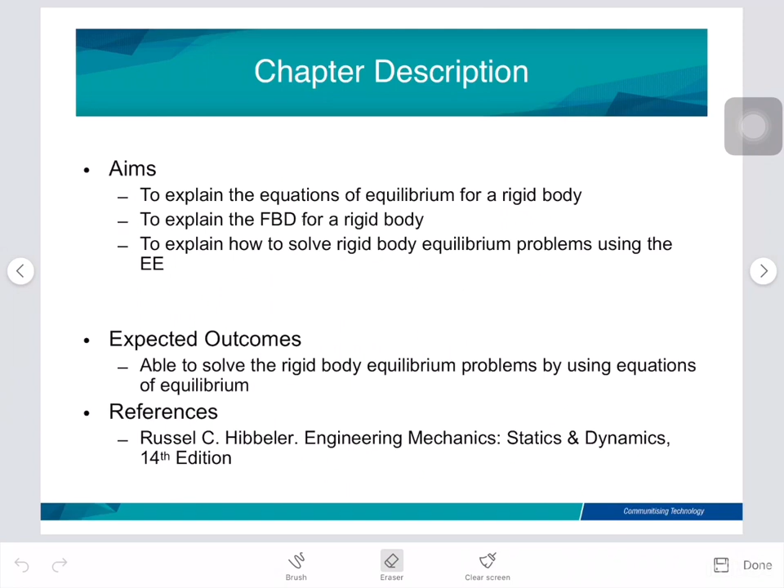Today we continue our new topic on equilibrium of a rigid body. The objectives of the lecture today are: number 1, you should be able to explain the conditions of equilibrium for a rigid body. Number 2, you should be able to sketch the free body diagram for a rigid body. And number 3, you should be able to solve the rigid body problems by using equations of equilibrium.

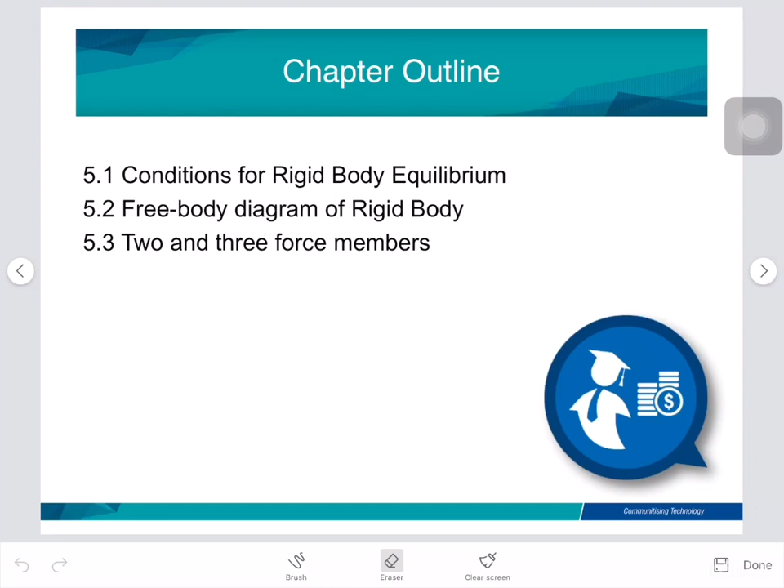Before that, we need to study what is the condition for the rigid body equilibrium. So here, what is the main difference between a particle and a rigid body?

Number 1, a particle is an object model, modeled as a particle. Number 2, it has a mass, but we neglect the shape and size. Number 3, for a particle to be in equilibrium, the sum of all forces acting on the particle is equal to 0, meaning the summation of force is equal to 0.

Now refer to the rigid body. So what is the rigid body? A rigid body is the complex level in the modeling of an object. It is a composition of many particles. And number 3, it can be any size or shape, unlike the model of a particle.

And then it can support moments, and it also has a support that prevents translation of the body in a particular direction, so the support exerts a force on the body in that direction. And if rotation is prevented, then the support exerts a couple moment on the body. So that is the difference between a particle and a rigid body.

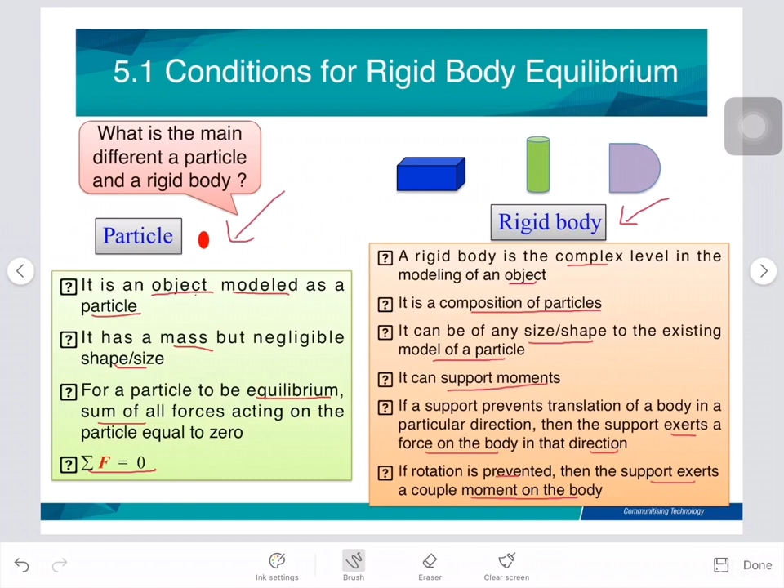Before we studied a lot on particles, now we focus on rigid bodies. Right, next.

What is the condition? You may refer to this figure 1 and figure 2. So what is the difference between figure 1 and figure 2? Figure 1 shows a particle, so normally force on a particle is concurrent, right? This is concurrent. Now we look into the force on the rigid body.

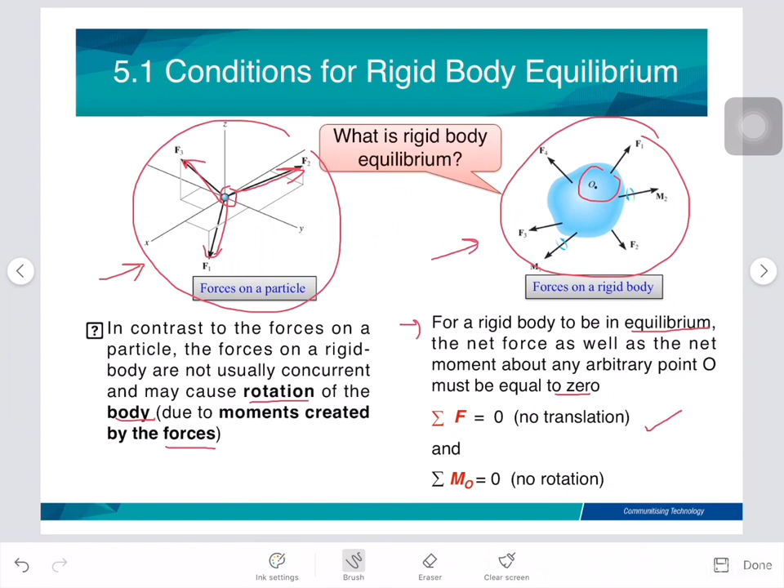Look at the force on the rigid body. In the rigid body, the forces are not usually concurrent because they may cause rotation of the body, which means moments created by the forces. Therefore, for a rigid body to be in equilibrium, the net force as well as the net moment about any arbitrary point O must be equal to 0. This means the summation of force equals 0, which means no translation, and also the summation of moment at point O is equal to 0, which means no rotation.

Next, we want to know the equations of equilibrium for 2D. We have a short name here: equations of equilibrium becomes EE. So when I mention EE, EE means equations of equilibrium.

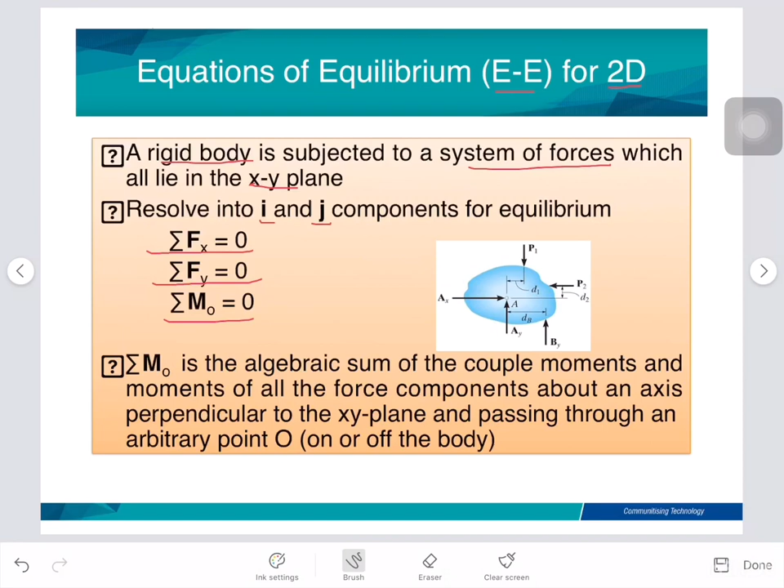Now for 2D, a rigid body is subjected to a system of forces which lie in the X and Y axes. For X and Y axis, we can resolve into I and J components for equilibrium. So when we resolve to I and J, we have summation of force in X equal to 0, summation Fy equal to 0, and summation moment at point O equal to 0.

Next, we have two alternative steps here. Number 1, if the line passing through points A and B is not perpendicular to the a-axis, we can have summation Fa equal to 0, summation moment at A equal to 0, summation MB equal to 0.

And second alternative, if points A, B and C do not lie on the same line, we can assume that summation moment A is equal to 0, summation moment MB is equal to 0, and summation MC is equal to 0. In order to understand more, we can see it when doing the example.

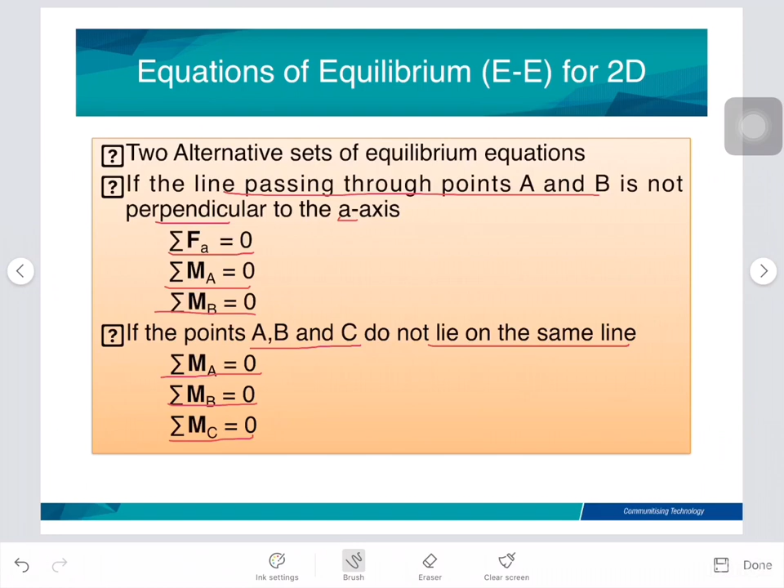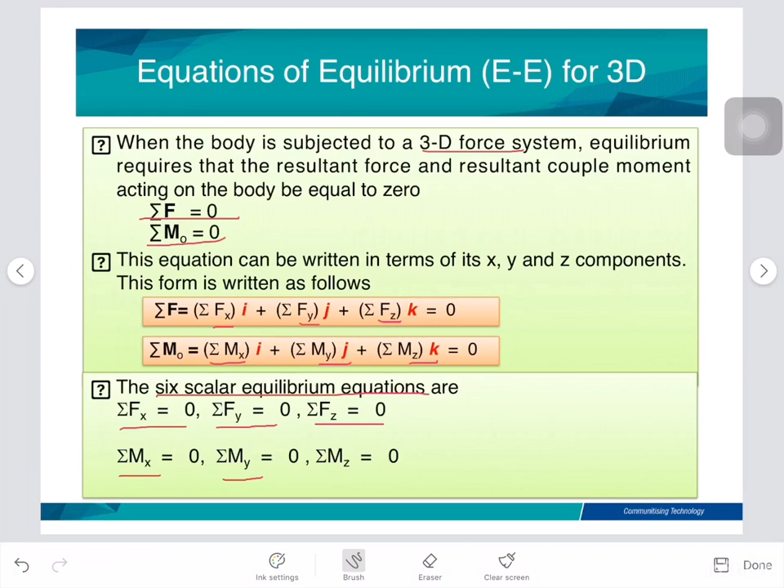Summation Fx is equal to 0, summation Fy is equal to 0, summation Fz is equal to 0, and also summation moment Mx equal to 0, summation moment My equal to 0, summation moment Mz equal to 0. This is for the 3D cases.

So now take a look why we need to study the rigid body equilibrium. For this figure shown, we have a uniform ramp. This ramp has a weight of 400 pounds.

Normally when we have the weight for the ramp, where is it acting? You must remember that. It is acting at the centroid of the body. So this one we label as W, weight.

Number 2, the ramp is pinned at A and held in position by the cable. So now we have a pin. Pin is one type of support reaction, here at point A, and then we have cables here. When we have a cable, we need to know what is the tension in the cable. So for this case, how can we determine the force acting at pin A and the force acting in the cable?

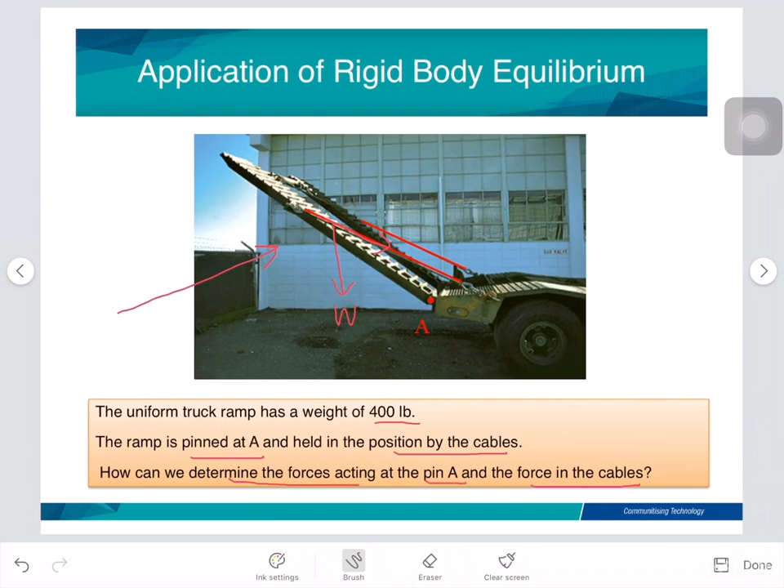So we need to draw the free body diagram. How can we do that? Now refer to this figure. From this figure, we need to transform into this free body diagram. FBD means free body diagram. So in the free body diagram, what should you mention, what should you sketch?

You need to sketch the ramp. This is the ramp. Now, the question mentioned that you have the self weight. So self weight W must act at the centroid like this, 400 pounds. And then we have the tension cable here. In the free body diagram, we must show this is the tension. Don't forget to label. And then we have pin support here.

So what is the pin support? You may refer to this, this is the pin support. When we know this is pin support, we need to know how many reactions at pin support. Pin support has 2 reactions, one vertical and one horizontal. So this is the free body diagram that you need to sketch before you solve the rigid body equilibrium. Understand? Okay, next.

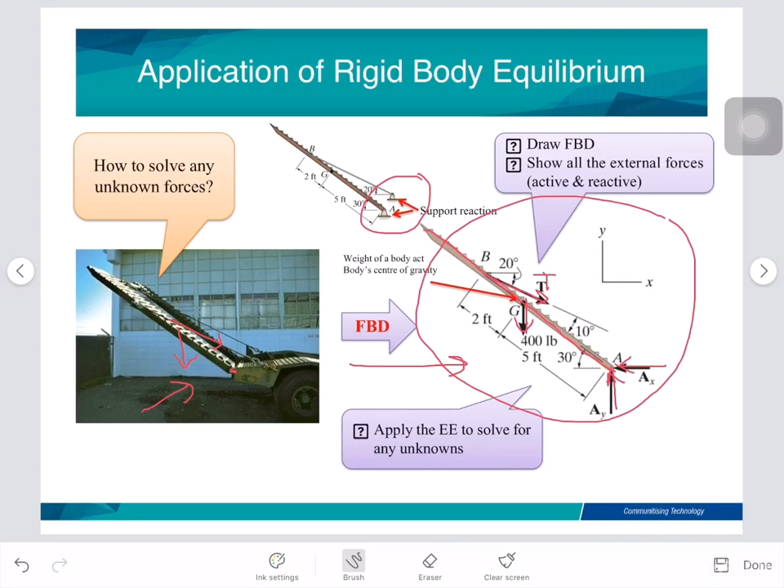This is another example which we have a cantilever beam here. This beam is 6 meters, and then we have a support at point A. The support at point A is a fixed support. Now, we also have a point load here. So this is the point load.

So how are we going to sketch the free body diagram? Number 1, when we sketch the free body diagram, you just make a line. After you make a line, you need to identify the external forces, any moment or applied load. Then you need to identify the support reaction, and whether they give you the self weight of the body or not.

If they have, you must show it. Number 1, remember the self weight must act at the centroid of the body. So let's say we have 6 meters here, the centroid must be at 3 meters, this point. And then we have the applied load here, so we just write back the applied load, 1,200.

And then here, fixed support. So fixed support, we need to identify how many reactions for this fixed support. Here we have 3 reactions: vertical, horizontal, and 1 moment here at point A. So this is how you should do it when you want to solve the problem.

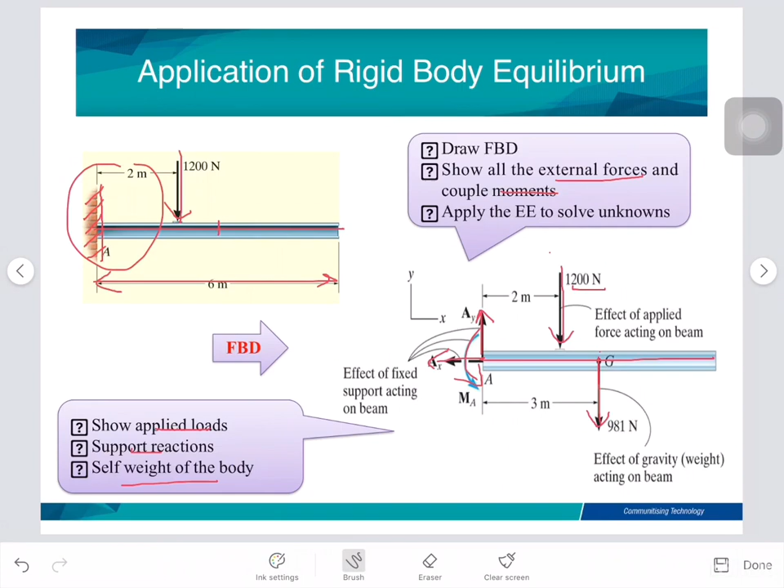Next, let's study the characteristics of the free body diagram. FBD number 1 is the best method to represent all the known and unknown forces. Number 2, FBD means you need to sketch the outline only, so you can isolate the surrounding. Number 3, you need to show all the forces and couple moments that the surrounding exerts on the body, so that the effect can be accounted for in the equilibrium condition.

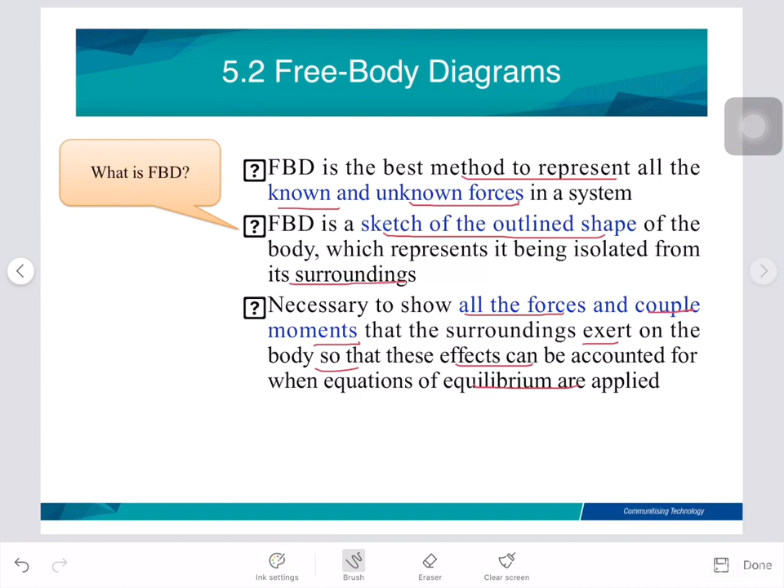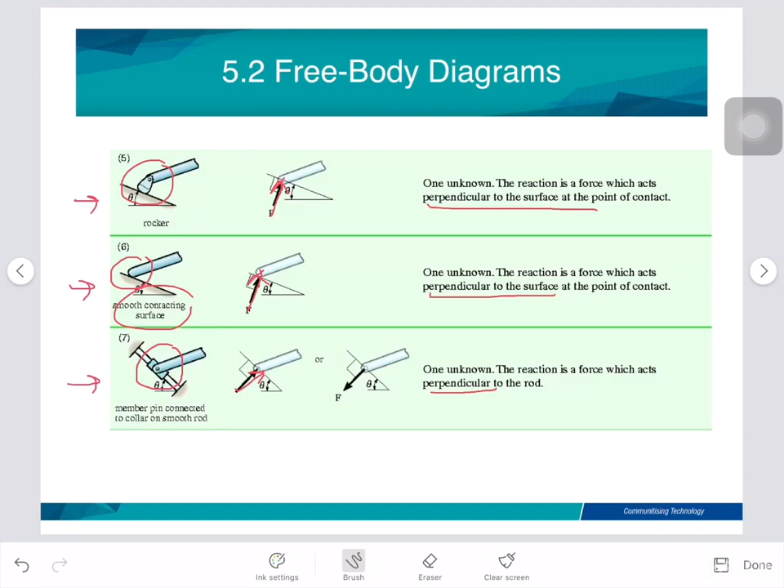And then this figure, we call member pin connected. You must be aware, this is the member pin connected. How many unknowns? We have one unknown, and this unknown also acts perpendicular to the rod. It can be like this, and also like this.

And then number 8, we call it a smooth pin or hinge. This pin or hinge has two unknowns. These two unknowns may have a component in y and a component in x, or you can resolve it as coplanar if you have the angle here.

And then the number 9 figure, we call it fixed connected. Just now we had member pin connected, but look at this — if we have a fixed connected, we're going to have two unknowns: one is the reaction force, and another one is a moment, which is perpendicular to the rod.

And then the last one, we have fixed support. This fixed support will have three unknowns: one moment, and another two are the reaction in y and reaction in the horizontal x. Or you can have this coplanar version — this is the force, this is the angle, and this is the moment. So this is the type of support or connection for the 2D cases. You have 10 types of connection, and you must remember this kind of thing.

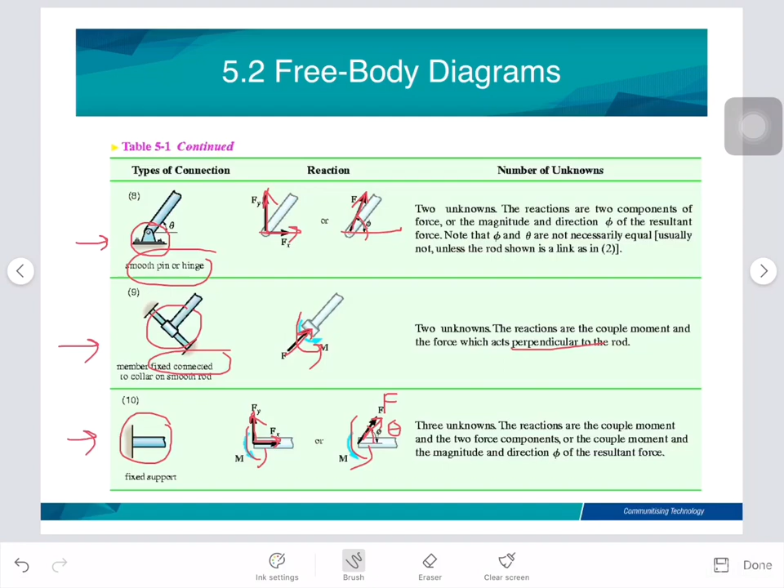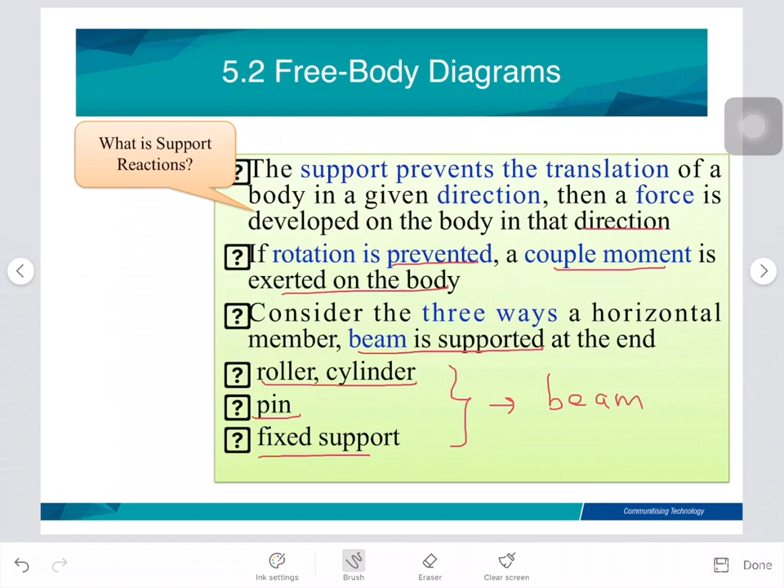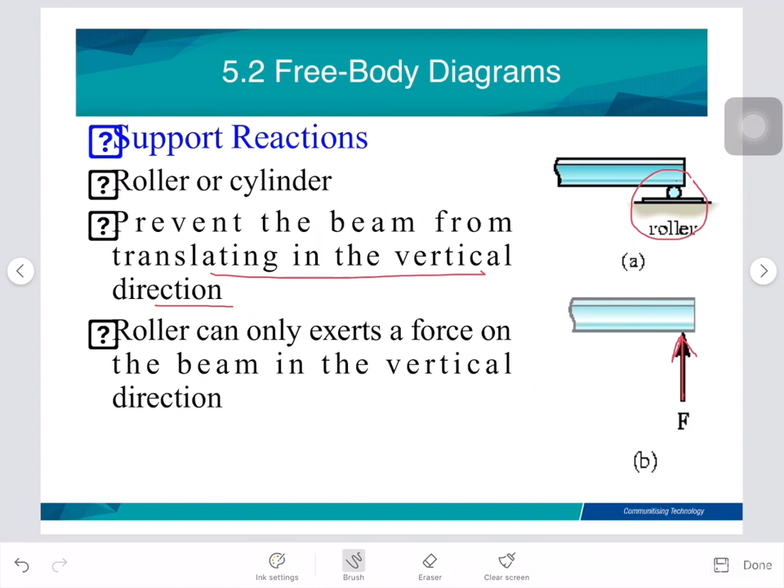This is an example for the support reaction. This is a roller — remember, when we have a roller, we have one unknown, and this unknown acts perpendicular to the point. So this roller prevents the beam from translating in the vertical direction. And the second one, pin — you can have this figure, or this figure, or like this, depending on the example.

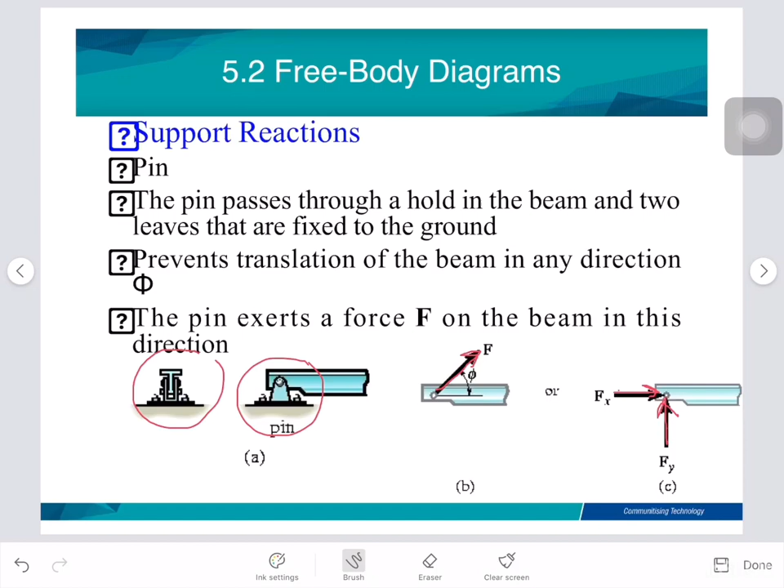So after you identify the type of support reaction, you need to know how many unknown forces there are. For this pin, we have 2 unknown forces, which means that this reaction prevents translation in horizontal and vertical directions.

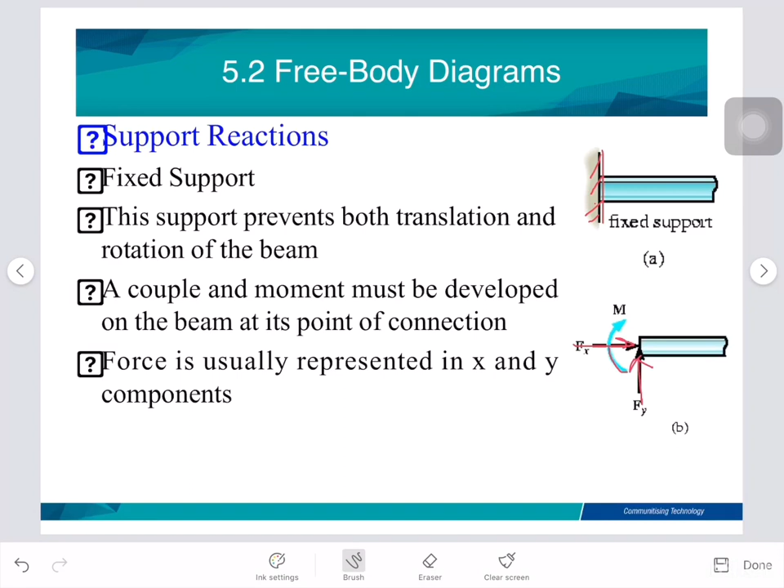This support reaction has 3 unknowns, which means that this support prevents translation and also rotation. Translation in x, translation in vertical, and then moment prevents rotation of the beam.

So this is the type of connection for real life. This is number 1: a cable exerts force on the bracket.

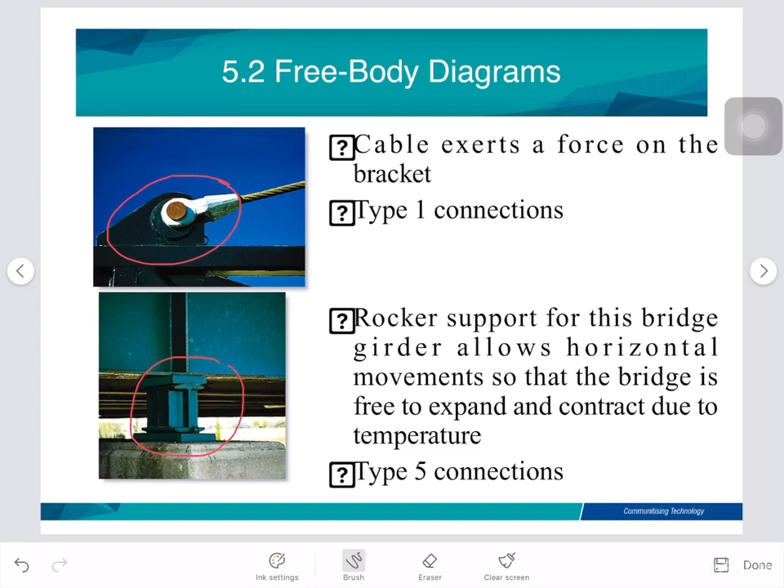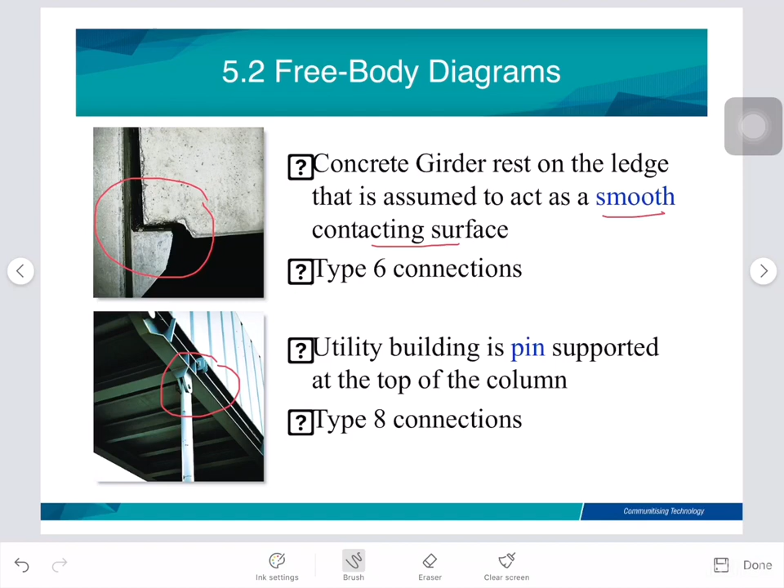Number 2 is a rocker, supporting the bridge girder, allowing horizontal movement so the bridge is free to expand and contract due to temperature. Then this one is a concrete girder resting on the ledge, assumed to have smooth contact. And this one is a utility building pin connected on top of the column.

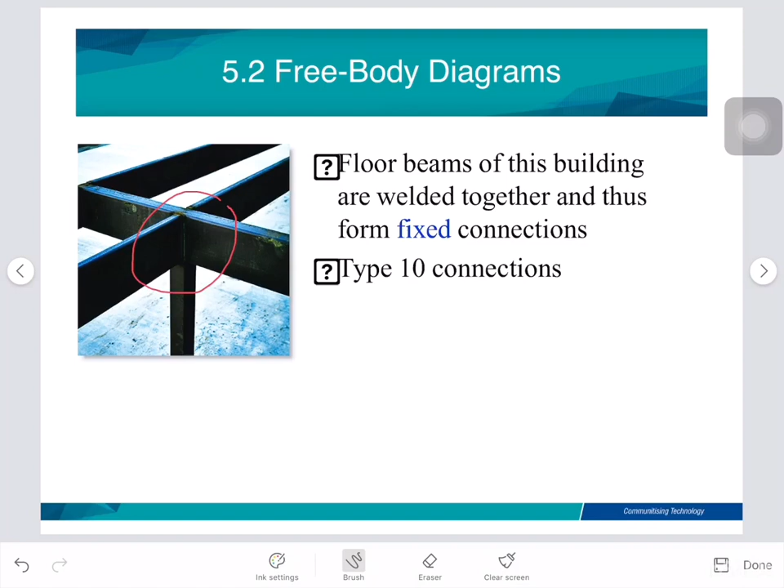And this one is the example of the fixed connection. The floor beams of the building are welded together and thus form a fixed connection.

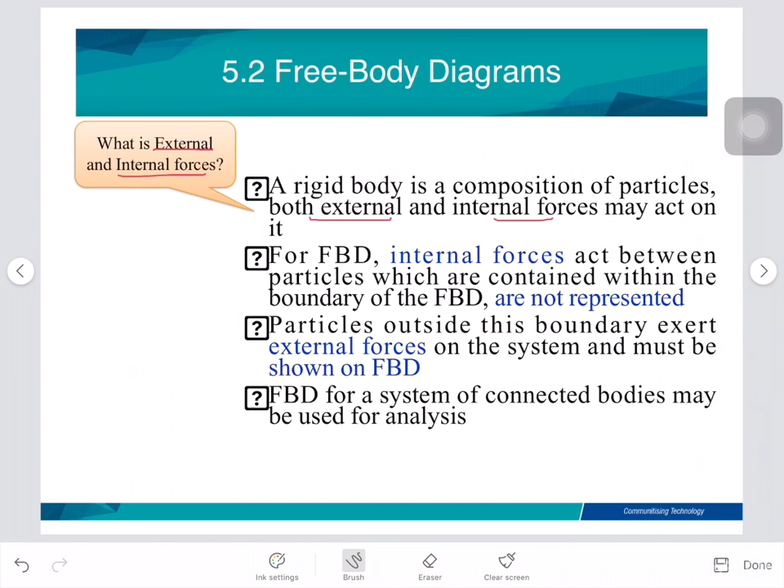Okay, the weight and the center of gravity. You must understand when a body is subjected to gravity, each particle has a specified weight. For the entire body, consider gravitational forces as a system of parallel forces acting on particles within the boundary. So you can present the weight by W.

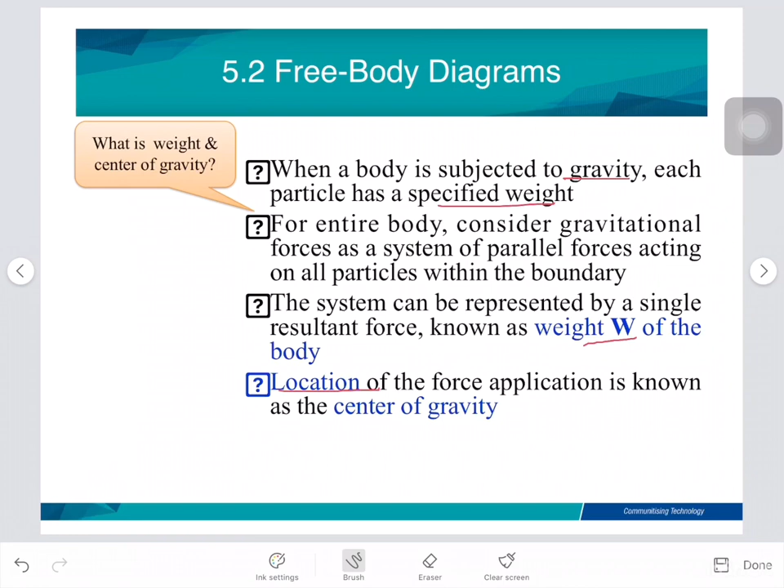When you define the weight W, you need to find its location. So the location of the force must be at the center of the body.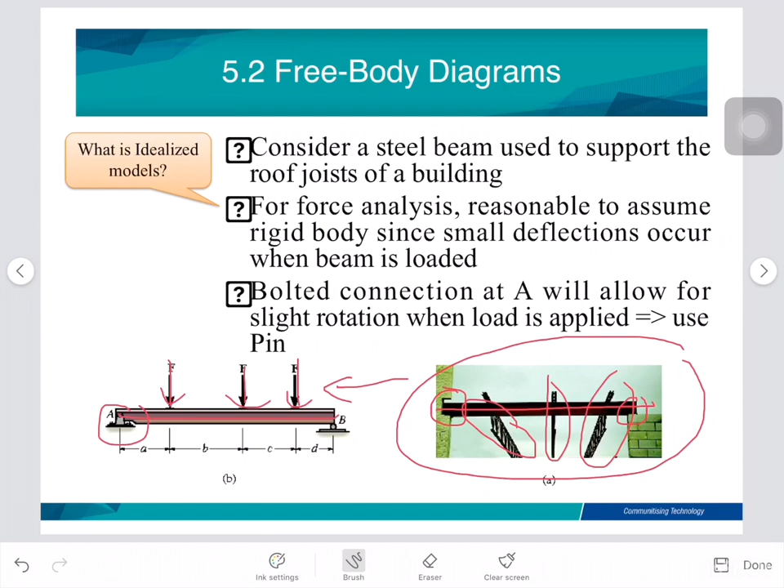So here this truss is represented by these forces. This one is this one, and this one is this one. This is the beam - this one means pin support, and here means roller support. So this is what is meant by the idealized model.

All right, so this is another one. You have here, you consider this boom supported by the pin. This is the pin at point A and point B. And then we have BC as a weightless link.

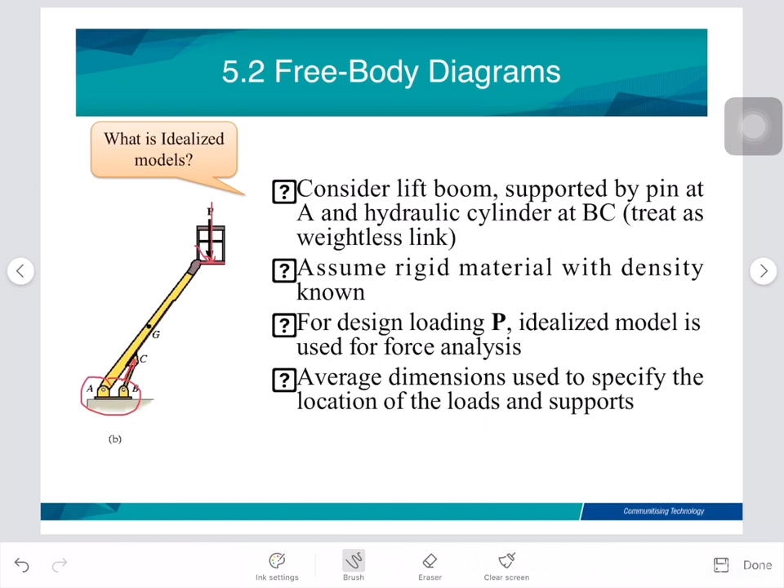Now we have the loading here, a point load here. Average dimensions are used to specify the location of the load and support.

So before we solve the problem for the rigid body, we need to know the steps to draw the free body diagram. So we have 3 steps here.

Number 1, you need to draw the outline shape. Imagine the body to be isolated or cut free from its constraints, so you can draw the outline.

Number 2, after you draw the outline, you must show all forces or couple moments. Couple moment means moment. Here you need to identify all the external forces or couple moments that act on the body.

And then you have any applied loading, and you need to identify the reactions that occur at the support, or point on the body.

And then you need to identify also whether the question gives the weight of the body, so you account for all the effects traced over the boundary - everything that is a force or couple moment acting on it.

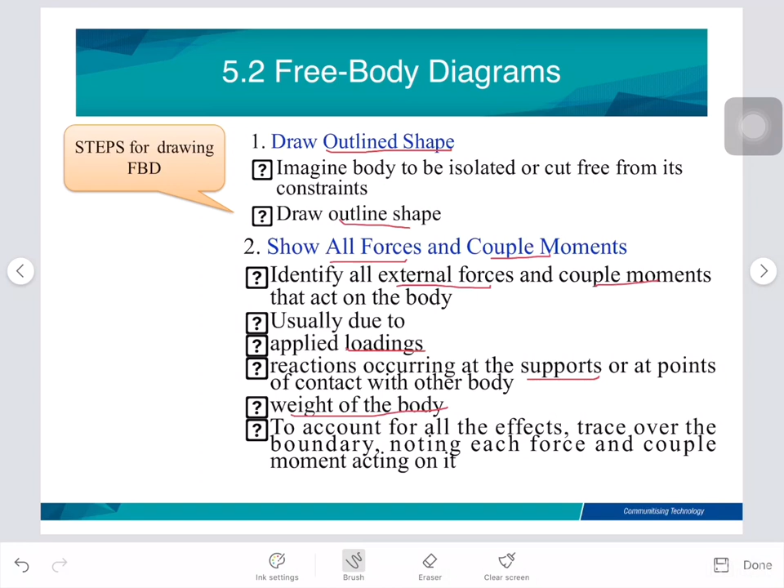And then the third one, identify each loading and dimension.

So for this example, we need to draw the free body diagram. How do we draw this free body diagram? So this is the weight, the weightless link, and the spring attached.

The operator applies a vertical force on the pedal so that the spring stretches 1.5 inches, and the force in the short link at B is 20 pounds. Draw the free body diagram of the foot pedal.

So now you can identify. At point B here, we have a link. How many unknowns does the link have? We have 1 force here, and then the spring - the spring also has 1 force here. And this one, what is this connection here? So here is a pin, right?

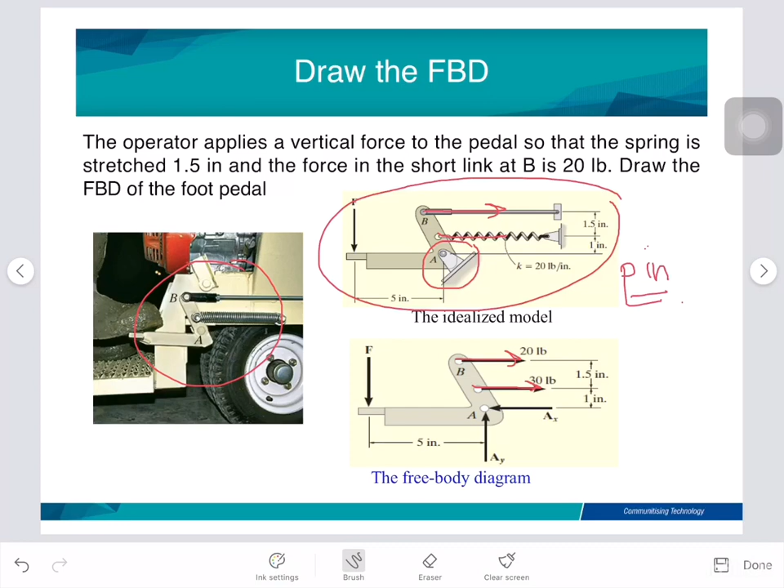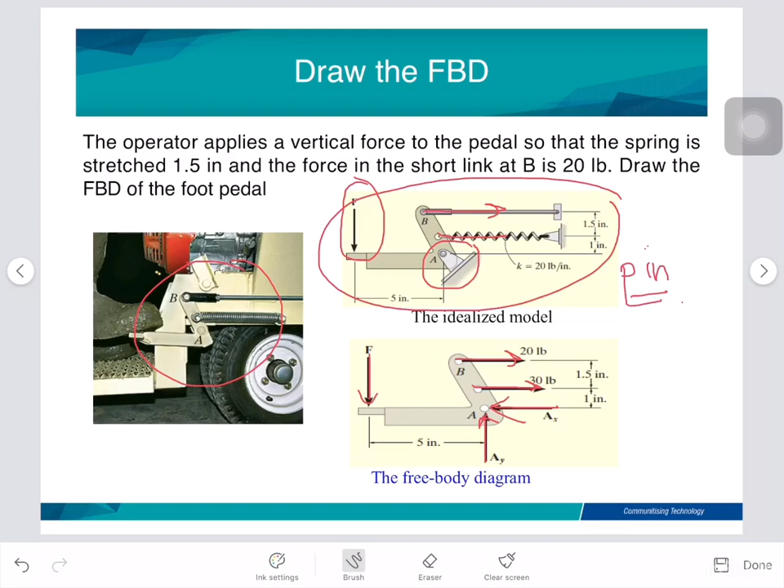So how many unknowns if pin? We have 2: vertical and horizontal. And then don't forget we have the point load here. Okay, so this is the free body diagram.

Alright, next, let's draw the free body diagram for this platform. This platform has a given mass of 200 kg. So when you draw, this is the idealized model. From here it becomes the idealized model, and from the idealized model we draw the free body diagram.

So this is you draw the platform. This platform, we need to identify the external forces. So now we have a cable. When we have cable, we have one unknown, so you must label T, tension force.

And then we need to know what is the connection here. So we have a pin. The pin has two unknowns, vertical and horizontal. Other than that, you should know the angle and the dimensions given, so you can write it into this free body diagram.

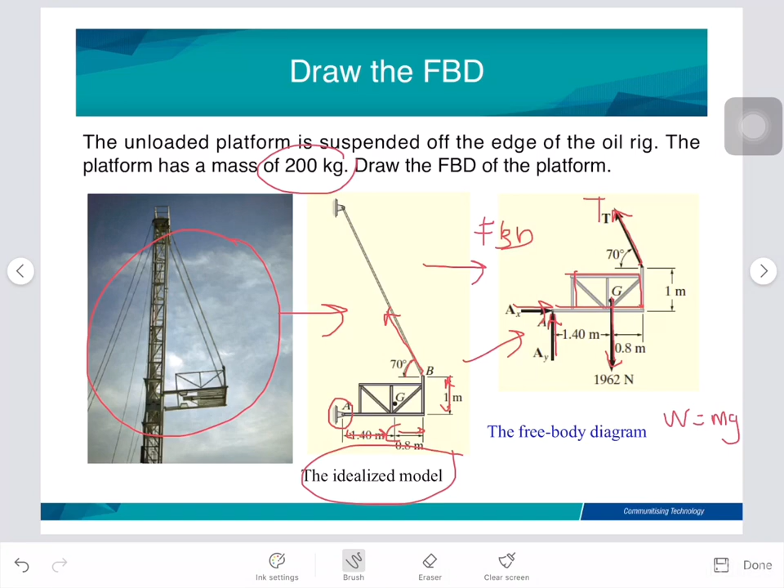Before we continue to the example, you need to identify, in order to simplify the equations of equilibrium, two-force members and three-force members. It's very simple, so you can refer to this figure.

So this figure has 2 points, point A and point B. We have force at A, FA, and force at B, FB. This force FA and FB have equal magnitude but opposite direction, meaning they have the same magnitude but opposite direction. So we can rename it as F. You can consider calculating at either this point or that point. That is the meaning of two-force members.

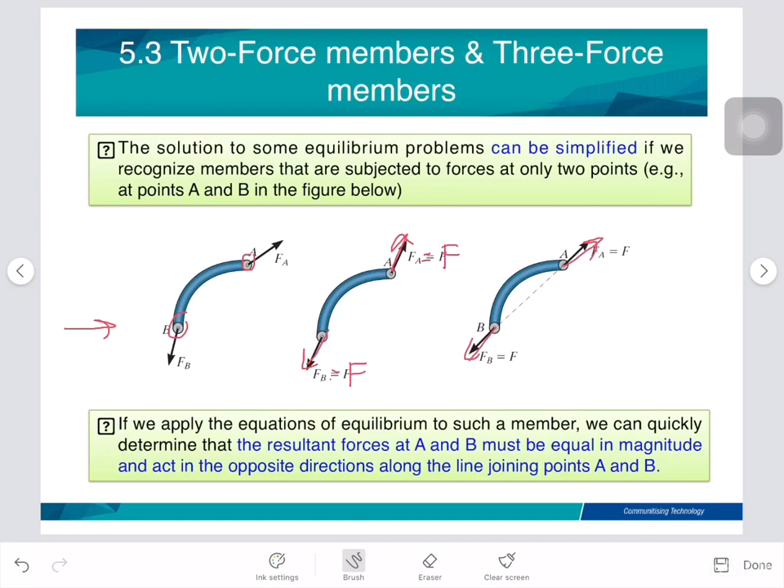Take a look at this example. This link has point A and point B. You can sketch like this. So we have FB and FA, and you can simplify as F. Also like this.

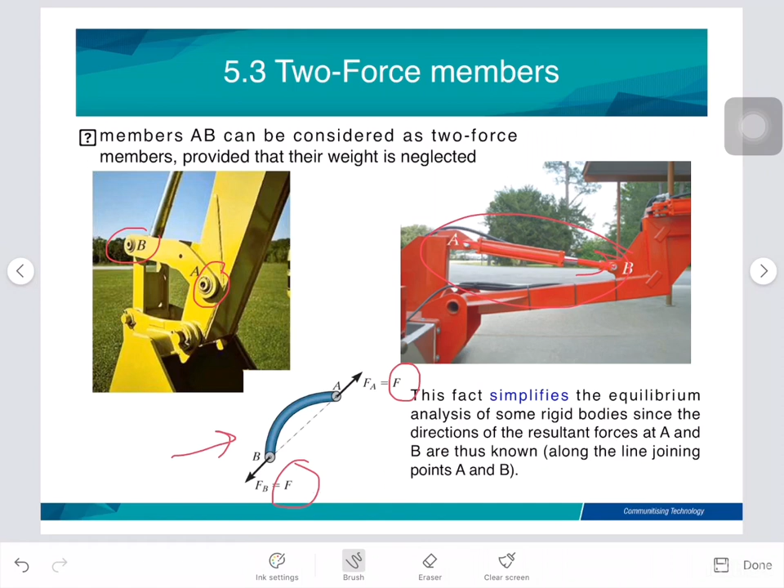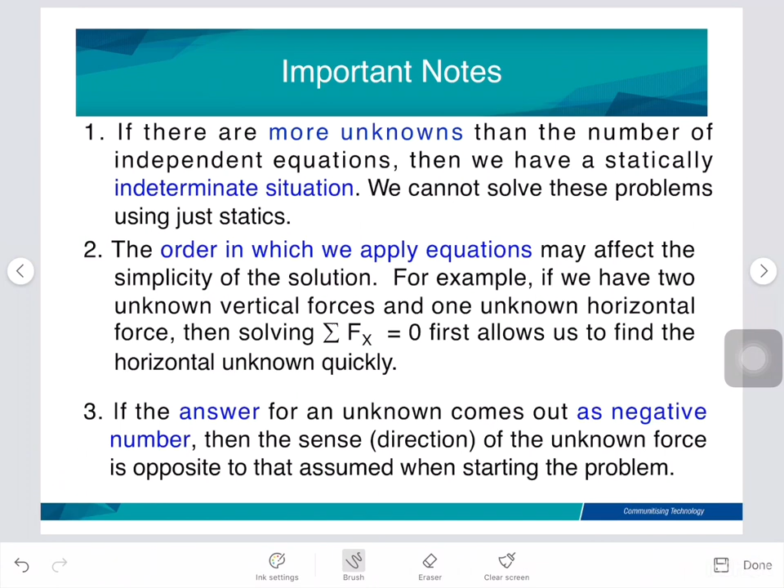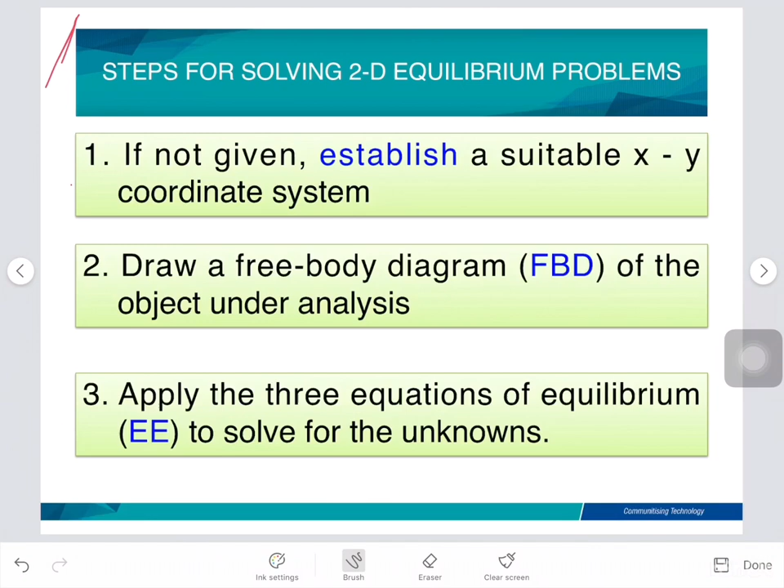Before that, we have 3 steps for solving 2D equilibrium problems. Number 1, if not given, establish a suitable x and y coordinate system. Number 2, draw the free body diagram of the object under analysis. Number 3, apply the 3 equations of equilibrium. What is that? We have 3 equations for the 2D problem: summation Fx equal to 0, summation Fy equal to 0, and summation moment about a point equal to 0.

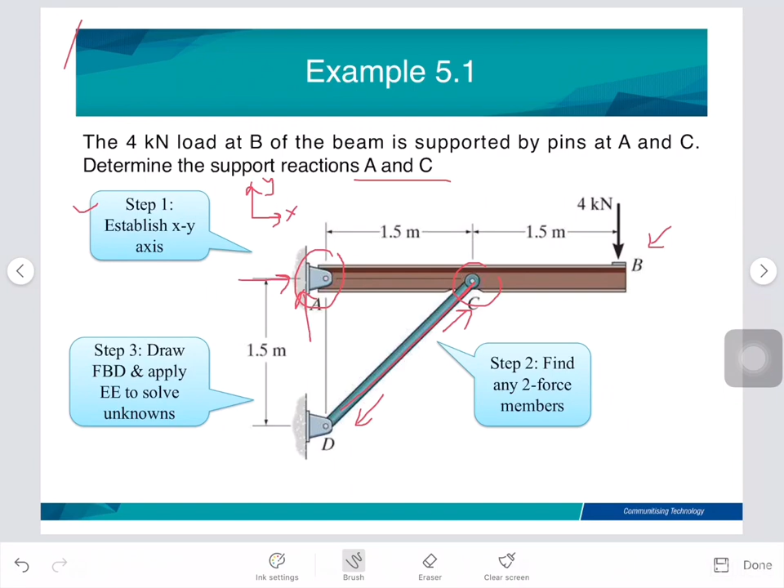Okay, and then we need to identify if we have pin support. How many unknowns for pin support? 1 or 2 unknowns. So for pin support, we have 2: horizontal and vertical. Then after you have identified everything, you can draw the free body diagram and apply the equations of equilibrium to solve the support reaction at A and C. Okay, let's draw the free body diagram.

So based on this figure, you need to start from like this. So here we have the beam. So for the beam, you just write one line like this. And then this one, we have the loading, point load. You write point load, and then don't forget the unit, 4 kilonewton.

And then here, this one, force members. So force member here, point C, okay, only one. And then here, support. So support direction, we have vertical, we have horizontal. Then you can label everything. You label this one AX, this one AY.

Then we have this one, we can have, okay, so here you can have FCD for this force, and then this point B, this point C, and this point A. And then don't forget the dimension, so dimension here, don't forget 1.5 meter. And also, because this is coplanar, we need to determine what is this angle. Right? We need to determine the angle. So it is 45 degrees because of this length.

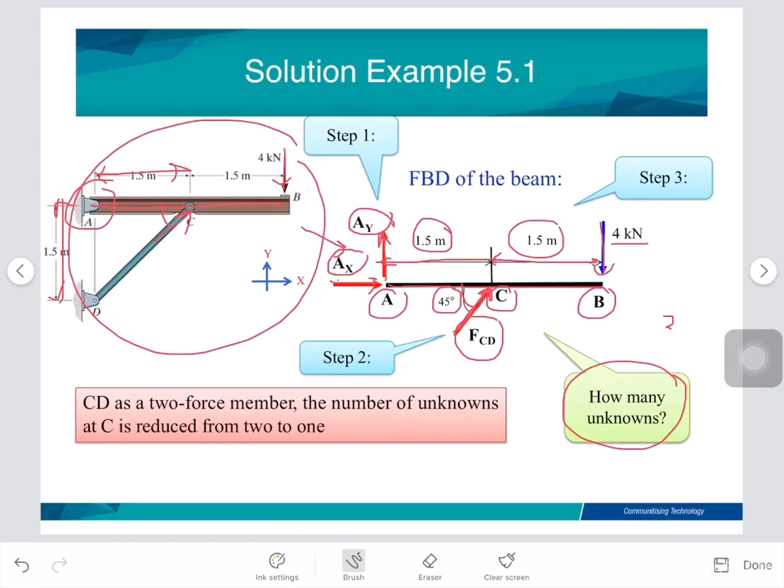Right, so now from this free body diagram, we need to choose which point we want to take moment equal to 0. So always, okay, the key here is always take the maximum point, maximum unknown. So for this case, which point has maximum unknowns? So we have point A, because point A has AX and AY. That's why we take moment at point A equal to 0.

So for this example, we write summation MA counterclockwise positive equal to 0, equal to FCD. This one, FCD, so FCD will resolve into vertical, so FCD sin 45, this one FCD times 1.5, okay, this one 1.5, right, distance. Force times distance, moment equals force times distance.

Okay, and then we have another point here, point load here, so this one going like this, moment, right? So this one becomes negative, because the moment becomes negative. So negative 4 times distance, so distance is 3, so this one negative 4 times 3. So when we sum up, FCD is equal to 11.31.

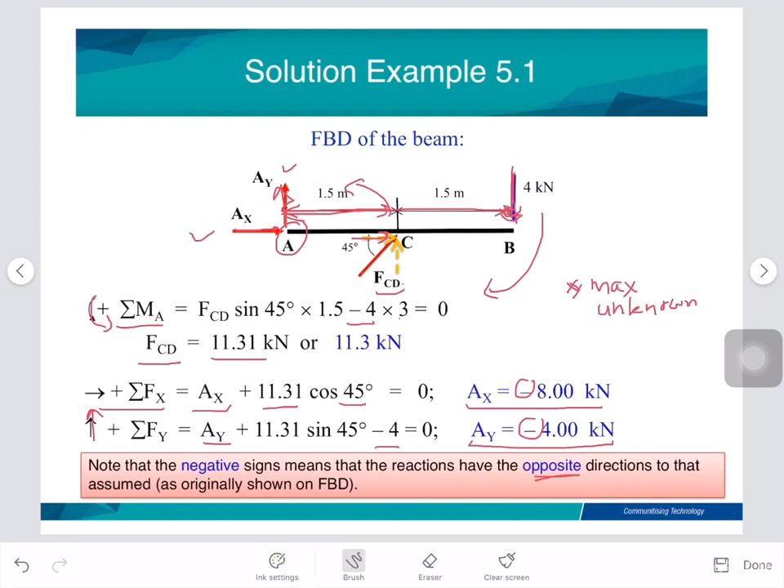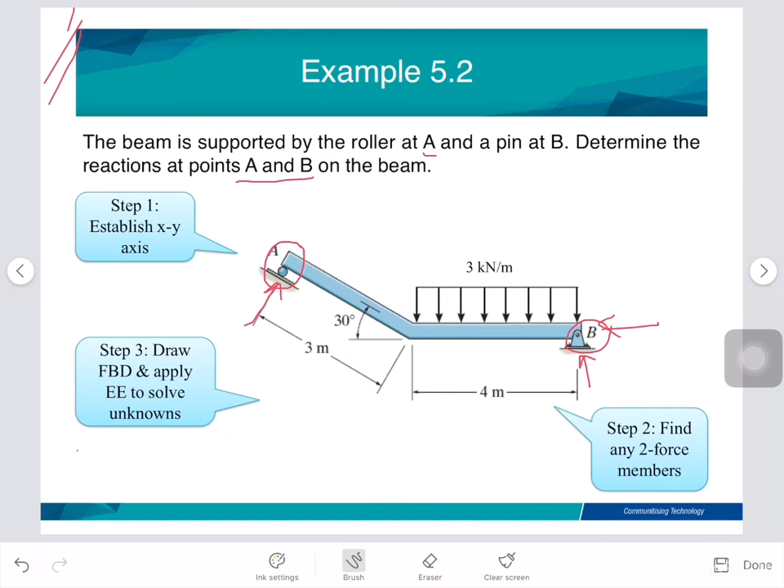Before that, we need to identify how many unknowns at point A. Point A is a roller, so we have one unknown acting perpendicular to the point. At point B, how many unknowns? We have 2, vertical and horizontal. Do we have any two-force member or three-force member? We don't have here, so now we can draw the free body diagram.

Now we carry on to solve the moment. So here, what we have is we want to draw the free body diagram. Before that, we need to resolve this UDL.

So this UDL, the W is equal to 3 kilonewton per meter. Now how are we going to reduce it? We want to find the resultant force or point load from the UDL. So how do we determine the magnitude? The magnitude is equal to the area of this rectangle.

Where is it acting? Normally the rectangular UDL acts at the middle of the beam, at the centroid. So the magnitude becomes area, 3 times 4, equal to 12. It acts at the middle of the beam, so 4 divided by 2 becomes 2. Now we can draw the free body diagram.

So now it's like this. This one is our axis Y and X. So this one is our beam. Just make a line. This one, and then another one. So we have the line here, and then don't forget to...

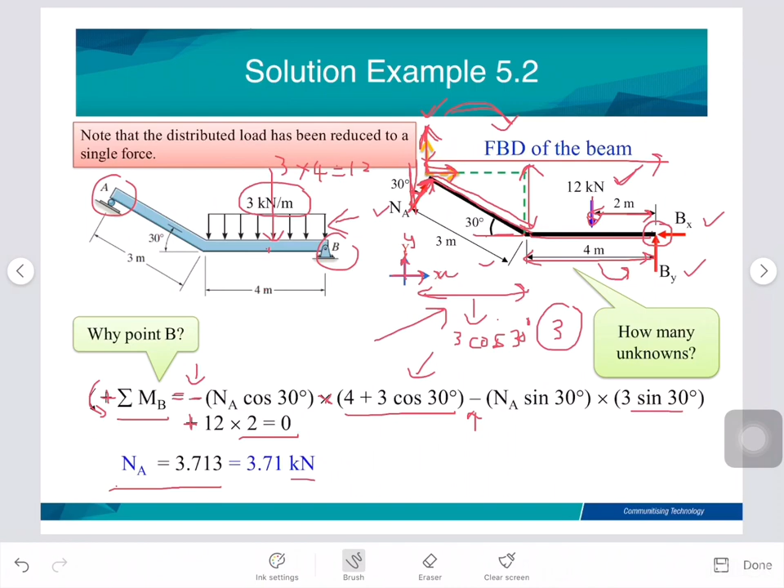After you solve, you determine that NA is equal to 3.71 kilonewton. Next, we want to determine the point B unknown reaction, let's say BX. So we write summation Fx to the right equals positive, resolving all forces in X. We have NA sin 30, so NA is 3.713 sin 30, minus BX. So BX becomes 1.86.

Now for BY, we write summation Fy positive upward, resolving all the vertical forces: this one, 12, and BY. So we have NA 3.713 cos 30, minus 12 because it goes downward, plus BY because it goes upward. Solving that, BY is equal to 8.78 kilonewton. So we can determine the support reaction at point A and also at point B.

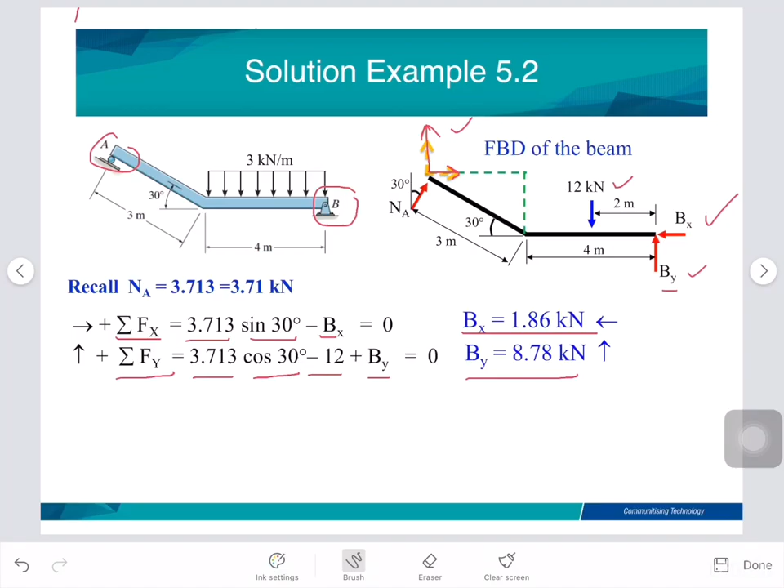Now we determine the support reaction at A and B for example 5.3. We need to identify what this beam is supported by. At point A, it's a roller, and point B is a pin. In order to solve, you need to identify how many unknowns: here we have 2, and here we have 1. Can you draw the free body diagram in order to solve the problem?

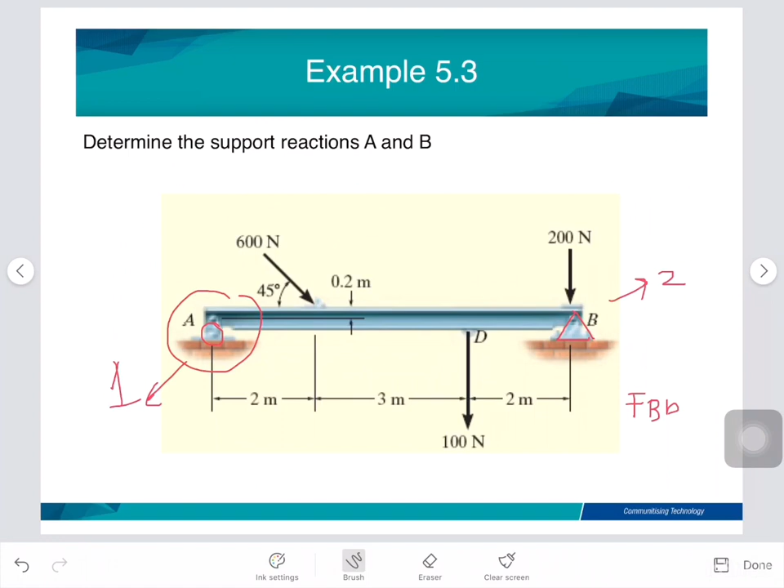So this is the free body diagram. Here this is the unknown for point A in Y, and this is the unknown for point B, because we resolve the coplanar force. Which unknown can you solve first? Definitely you may solve for AY by taking moment at point B, because point B has the maximum unknowns. So you need to solve summation moment at point B, positive equals 0, in order to get AY.

After that, you can solve for BY and BX. So this is the answer: AY is 319, BY is 405 Newton, and BX is 424 Newton. I hope you can do this.

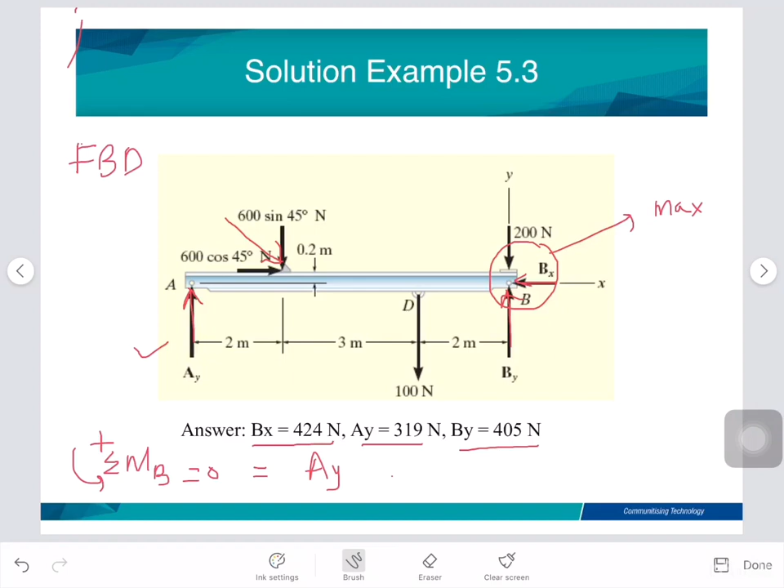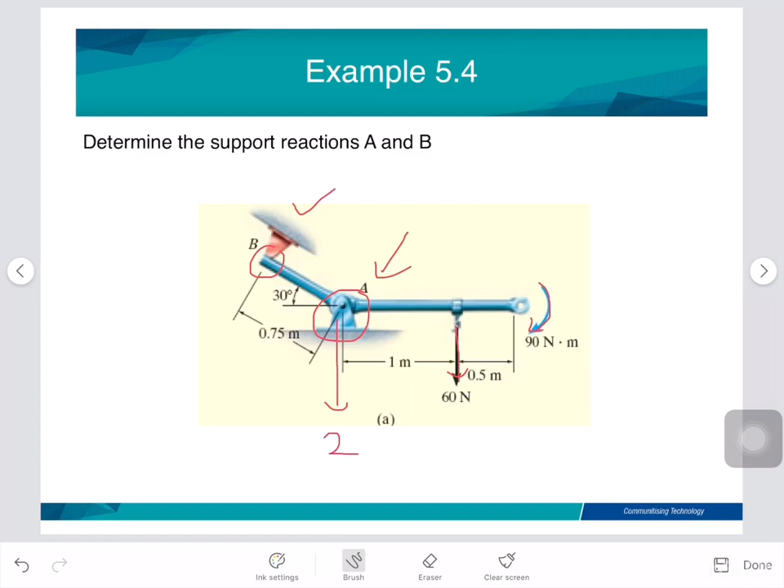The next example, 5.4: determine the support reaction at A and B. What is the type of support at A? A is a pin, so you have 2 unknowns. At B, how many unknowns do you have? 1. Here you have a point load and an acting moment. Which point can you solve first? Definitely at B, because you take summation moment at A, which has the maximum unknowns, equal to 0, then you can solve for point B.

So this is the free body diagram, then this is the answer: NB 200 Newton, AX 100 Newton, and AY 233. I hope you can solve this.

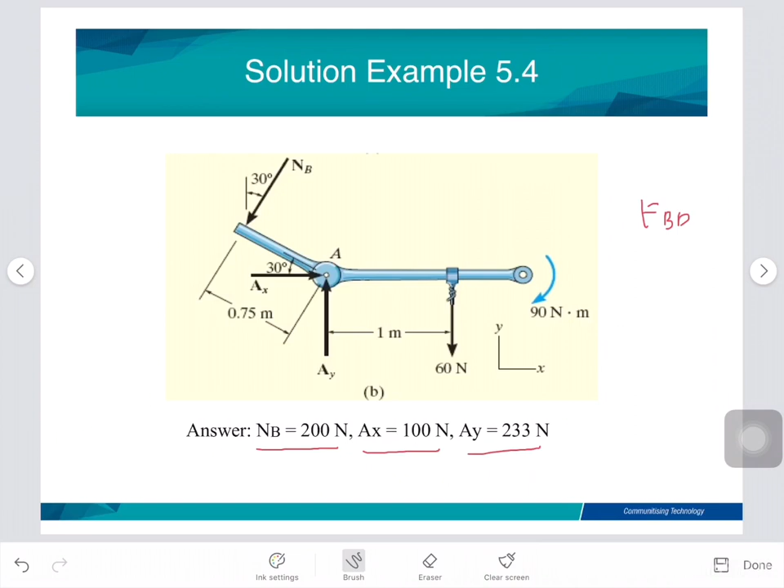The last example, 5.5, is to determine the support reaction at A and B. What is the type of support at A? Pin, so how many unknowns? The support reaction at B, how many reactions? We have 2. What type of support at B? B is a roller, smooth surface, so we have 1 there. So we have 3 unknowns total.

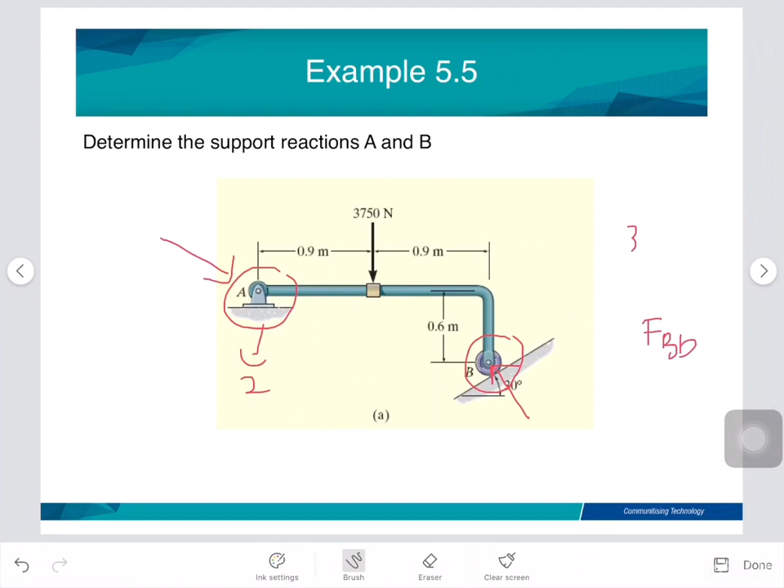Which point can you solve by taking moment equal to 0? Definitely at A, because A has the maximum unknowns. I hope you can draw the free body diagram and solve the support reaction at A and B. So this is the free body diagram and this is the answer: NB 436 Newton, AX 268 Newton, AY is 286 Newton.

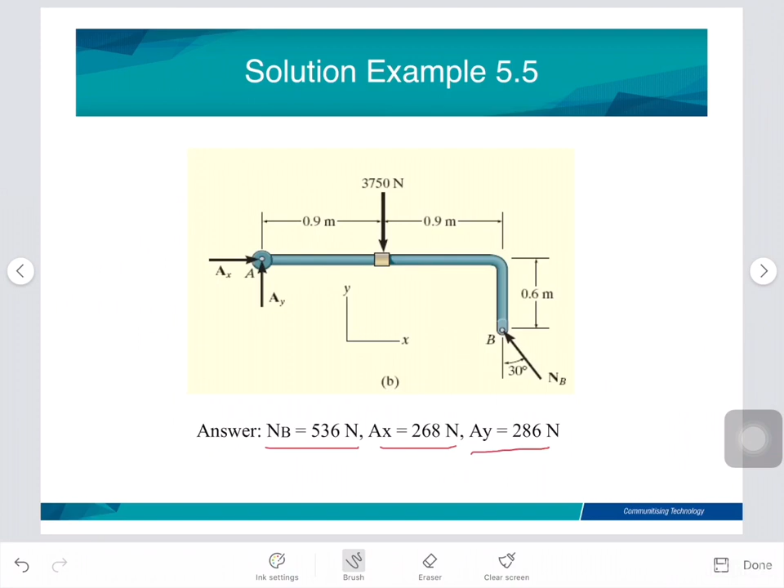That's all for today. Hope you can achieve the outcome of the lecture. Number 1, you should be able to explain the conditions of the equilibrium of the rigid body. Number 2, you should be able to draw the free body diagram. Number 3, you should be able to solve the rigid body problem by using the equations of equilibrium.